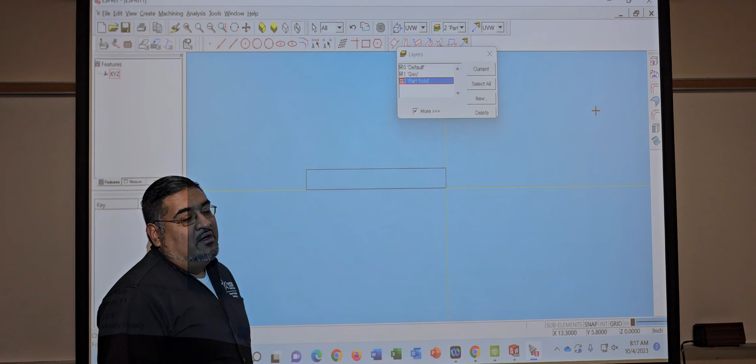Alright, so all we did right now, Corey, is basically draw a square, pick up the layers, and activate the SolidMill under features, right?

Alright, so from this point, we're gonna revolve, right? Remember, if I go 1.5 and I revolve, that's 3 inches total, correct? So I'm gonna go ahead and change my tools, get my hot pink going on, options, group lines.

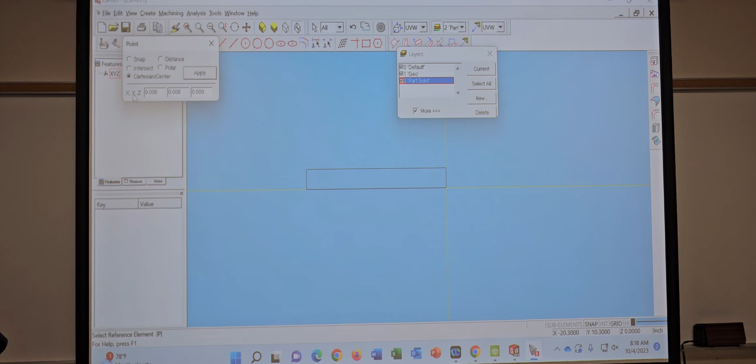So Corey, go to point, and then in Cartesian, on X put -12, and on Y put positive 1.5. Enter. -12 and 1.5. Yeah, hit enter. See how I made that dot?

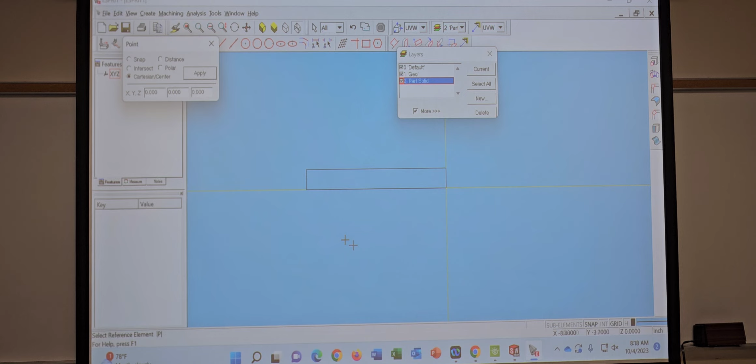So Corey's is showing like the stock material of the lathe, right? I don't know if y'all went over this through intro, correct? But if I hit Control M, that turns on my mask, right? So here, if I go to details, lathe stock, if I unclick that, it should go away, right? What about the chuck? Is that in there too? So there should be. Because the yellow stock went away, but then the green chuck's still in there.

So lathe stock. That's not gonna be on there. Yeah, I think, cause you had already worked on that, right? Yeah, it's brand new. I just opened brand new. You just opened it? I don't know why that came up then. Because I hit this, oh solid, he went to the solid, the solid turn. Solid turn. That's why. Oh, okay. I mean, which we are gonna be under solid turn. I'll just wait till we get to that point.

So, lathe stock. Oh no, wait, we're gonna be under mill. Yeah, oh, this is mill? Yeah, cause we're doing the holes. There we go. We're good. All's well. Yeah, so this is what we're gonna be using, guys. This wrap drilling, wrap contouring, and everything like that. We're gonna use that for doing the live tooling. All right. Okay, so we're on mill then, not, yeah, lathe. We're on mill. Okay. All right.

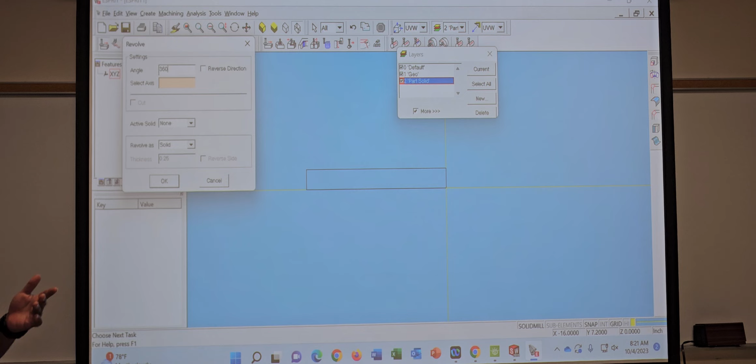I'm gonna hit revolve boss cut. So by default, angle comes on at 90, right? We want to hit 360 on there. So what this is gonna do is it's gonna show you the feature all the way around 360, correct? If we leave it on 90, only 90 degrees of it's gonna come out. 180, only half of it, right? 270, 3/4 of it. 360 is gonna do the whole thing, correct?

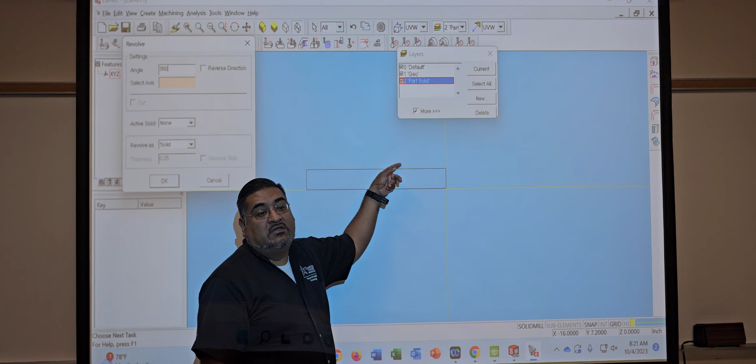So now, what it's saying on the bottom, select axis. Select what axis we're gonna turn this feature on. Does that make sense? So if I have a feature that has a bore and is coming up and everything like that, this X line can still be used and you're still gonna click the X line. Because if I click, like let's say this one, it's gonna do the 360 on this, right? So since I'm gonna put it here though, it's gonna sit true to the machine on the spindle center. Does that make sense? So I'm gonna click select axis.

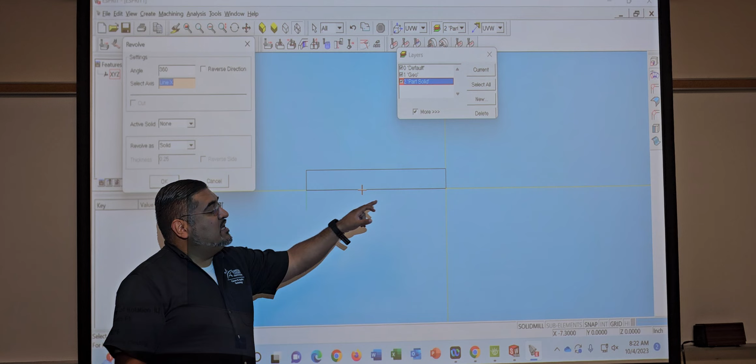Now it's telling me right here, select center rotation, right? So I'm gonna click that line. Now, since I just opened this up, I could see that these green lines came in, right? But why can't I see my drawing? Because of my shaded view. It's not activated, correct? So if you do that and you're like, I'm doing it and nothing's happening...

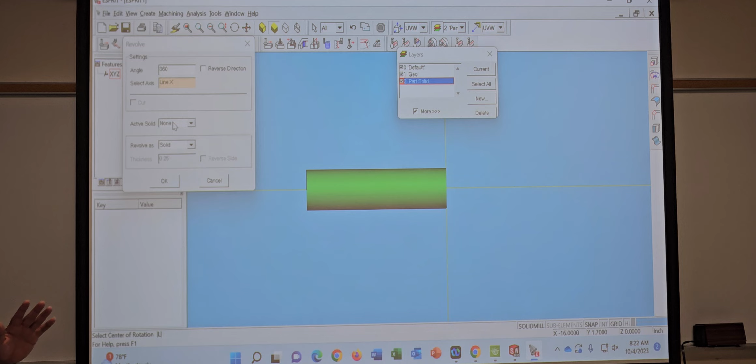There it is, right? So since it's our first solid, we don't have to put active solid. We leave it blank, right? Then we're gonna hit OK. So there it is, right? So since we made this one on the part solid, if I check that out, it goes away. Comes in, goes away, right? That easy.

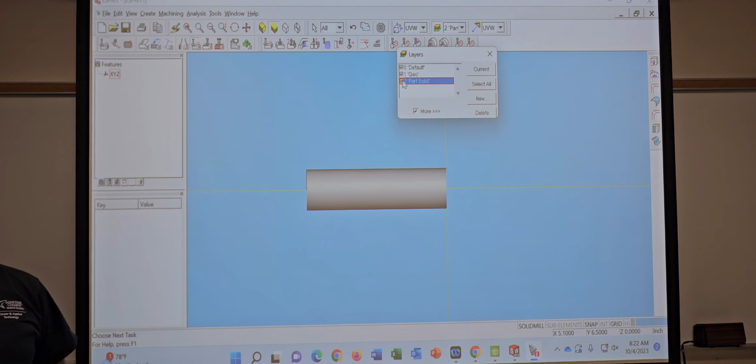Where's my Geo though? My Geo's gone. I don't think you made it because we already had ours. No.

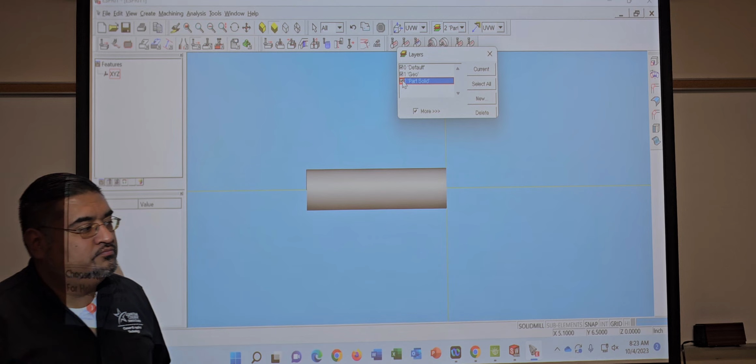So quiet here today, because we're just scanning in here. The mustache ain't talking.

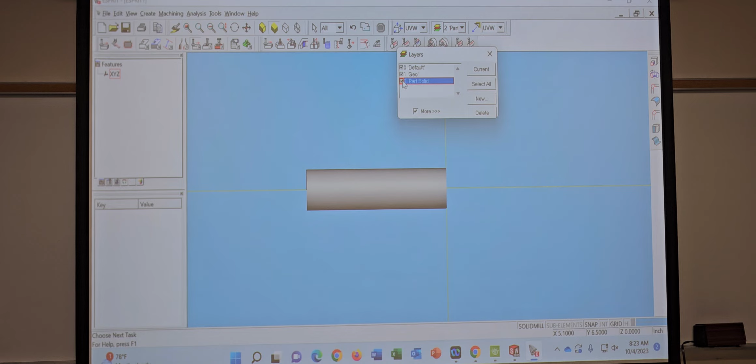Alright, now, just as we said earlier, guys, there's different ways of doing this, right? So typically, normally, the way that they would show you to do it is go back to unbounded geometry, create that point, and then on X, go -2, right? On, times 2, -2 on the X, right? And it's just gonna take you right there, correct?

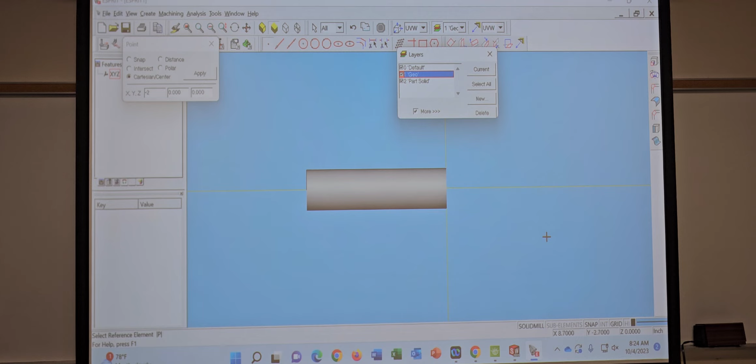So if I do that, oh look, I'm on the part solid, right? So if I click it though, it's there, but I can't see it because it's on the part solid, right? So I'm gonna highlight Geo, take off part solid, then do it again. So -2, apply, there it is, right? But if I turn on my solid, it's still in the center of the part, right? It's on the X-axis, but it's inside of the feature, right? Dead center of it, correct?

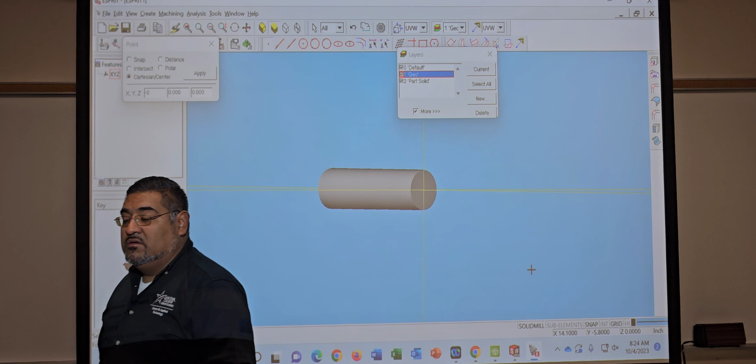Mm-hmm. So there's a few ways of working this out. I can just unclick it, click that point, right click, copy, translate it. So I'm gonna move it on Z. How much? 1.25. 1.5, right?

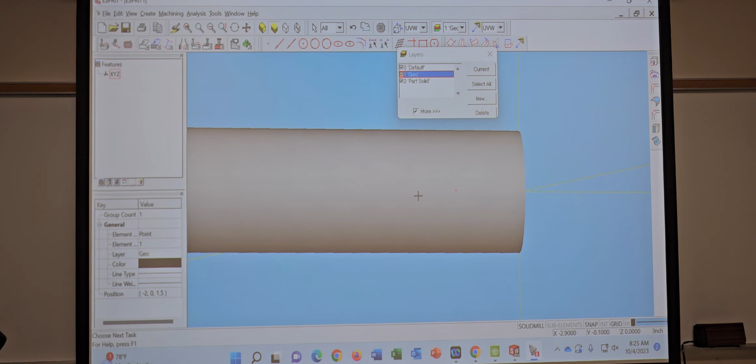Enter. So you see how I moved it up? And even if I put on my part now I know that it's there, correct? Or the most faster way, guys, but you gotta know what you're doing, because you could confuse yourself, right?

Let's click that point, go X -2, and on this Z. So this is for X, this is for Y, and this is for Z, correct? So on that Z, put 1.5 there, and it automatically brings it up, right? So that's the faster way of doing it. So you can do it any way you want, but as long as it's there, that's what matters, all right?

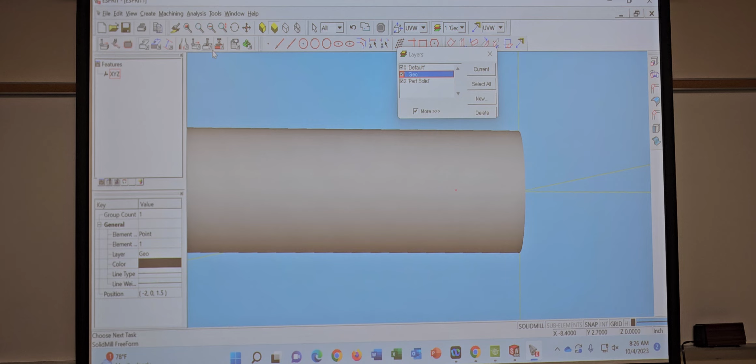I don't get it. Mine's not in there. So watch. -2. No, that's on the inside, 0.1. In fact, I go up. It's not gonna go up as Y, it's gonna go towards you. So it might be where it's at right now, but okay. Yeah, wait, that is towards me. Where's the other one? That 1.5 brings it towards you.

Yeah, so X is left to right, Y is up and down, Z is towards you and away from you, correct? Z is up and down, right? Well, if I'm looking at it like this, copy, right?

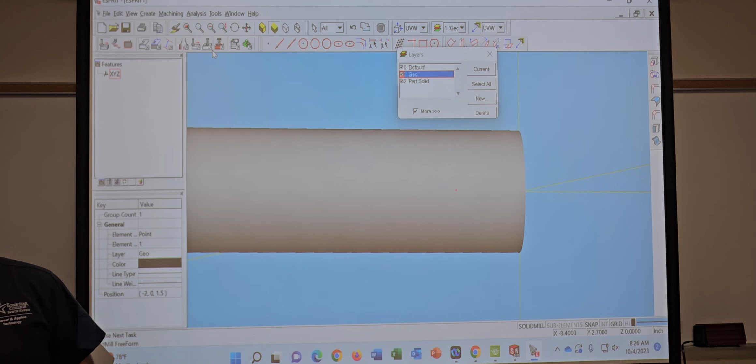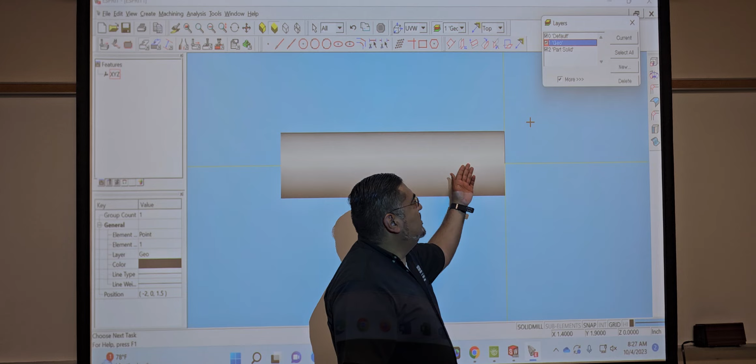Now, remember, it's not the same as on the actual mill, yes. Your X is this way, Y, the table goes this way, looking up and down, your Z goes up and down, looking down at the part. Yeah, but if I'm looking at it on ESPRIT, this is X, this is Y, and Z is coming towards you and away from you, correct? So we gotta kind of switch our mind, kind of looking down at it. Yeah, I see what you're saying.

Pretend you're an angel hovering above, floating, looking down. Your little wings flapping. Yeah, your little ponytail spinning really fast, holding you up.

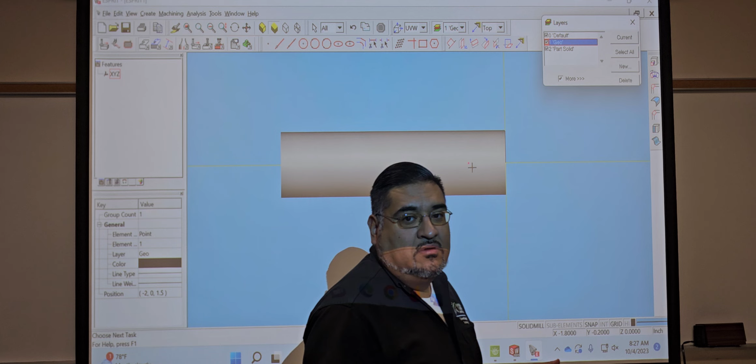Alright, so after that, really guys, we could just make this point rotate, right? Because when I do my P-top, all I gotta do is click the points, correct? And then whatever drill I pick, that's gonna show the actual drill that it goes in there, the feature, right, on the simulator.

But if we wanted to do the circles, okay, too easy. Draw the circle, bring it here. That's what, a 1 inch? Yeah, 0.5 for the radius, right?

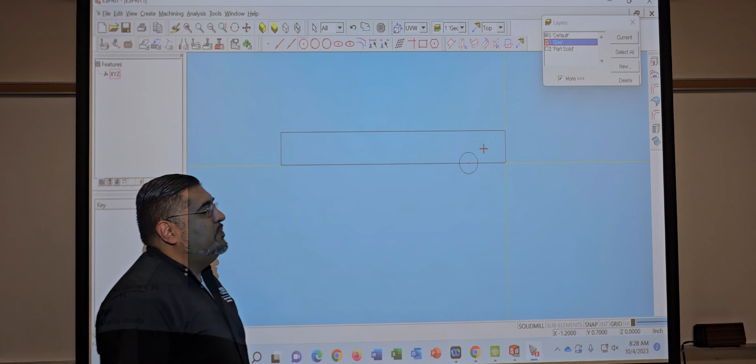And there it is. I'm a big fan of just putting the point there, right? Especially since in ESPRIT you could pick different tools to follow the same p-top, right? So if I'm doing this in real life, I'm putting a center drill first. And if I'm messing with Inconel, I'm making a pilot hole, right? And then after that, I'm using the drill, the end mill, whatever I need to take it to size, right? Because we gotta think about it in real life, guys.

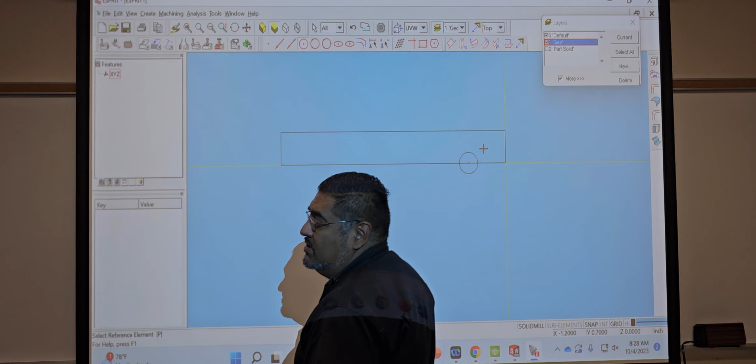If I have this 12-inch part sticking out, I'm actually putting a tailstock in the front of it too, right? To support it between centers, correct? And if I'm just using an end mill, but it's Inconel, oh, there ain't no way I'm gonna be using a high-speed steel drill, HSS end mill, to just go in there, go to town with it, and then come out. You won't even get done with the first 12, and that end mill will break, right?

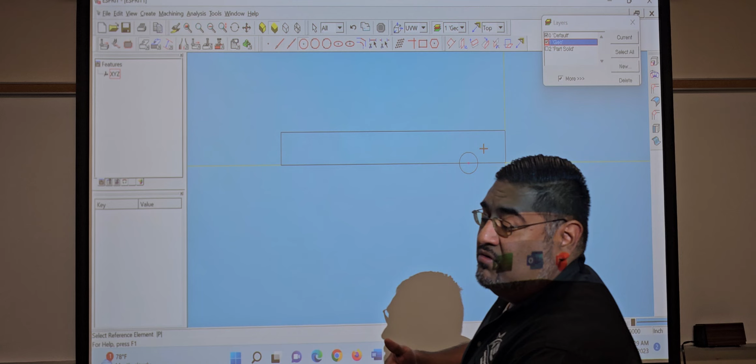So if I'm doing this with Inconel, like I said, I'm gonna do a spot drill, then I'm gonna drill down there. I'll probably drill the size of the hole, or maybe a little bit smaller, but at the bottom it's gonna create that point too, right? Because of the drill angle, whether it be 118 degrees, 90 degrees, or whatever it is, correct? Then I'm gonna come in there with my end mill and clean it up. Does that make sense? We're just teaching you guys right now how to do the operations, but if you do it in real life at a shop, you might need to do all those operations, correct?

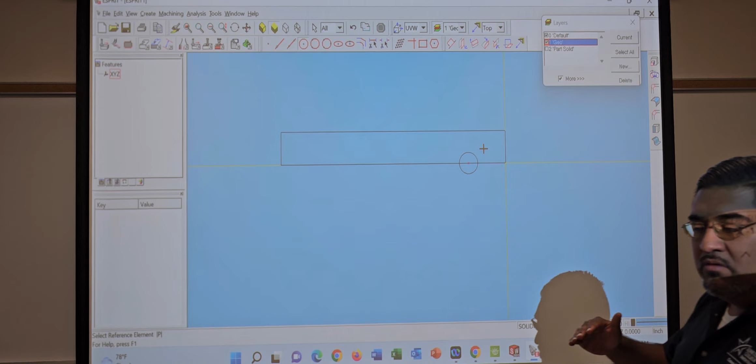And then on top of that, we know that we gotta make sure that our tools are where we need them at, right? Because when you're talking about live tooling, when you guys haven't done the fundamentals class yet, when we're doing live tooling out there, you're gonna see how there's a station in between, right? Yeah, we talked, actually Gabriel talked about that. So yeah, there has to be a station in between just for clearance stuff, correct?

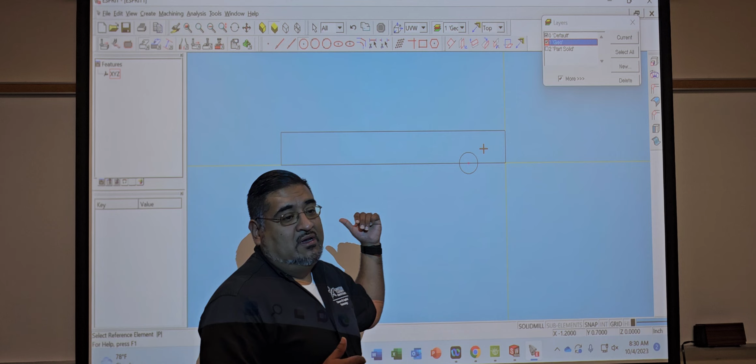So my tools have to match up with what I have in there. It doesn't matter what I put in here, it could care less. And when it generates that code and puts it out there on that machine, I gotta go through the code and make sure my workstation, my axial end mill, is matching up.

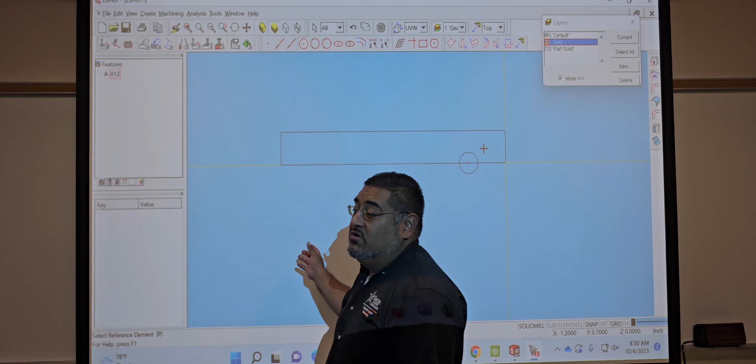You put 3 stations on that lathe, you're basically using up how many? 6. Minimum 6, and that's you putting them correctly. Might be even 7, because your tool number 1 will probably be on the other side of it, so you can't separate it. You get what I'm saying?

So if you're only doing the part that's facing, turning, and doing these holes, yeah, all day long. But what happens if you have more features on this part? What happens if you have facing, turning, so you need a rougher, you need a finisher. Then you have OD grooving. Then you have bores. You're gonna have way too many tools to make it make sense for you to do live tooling there.

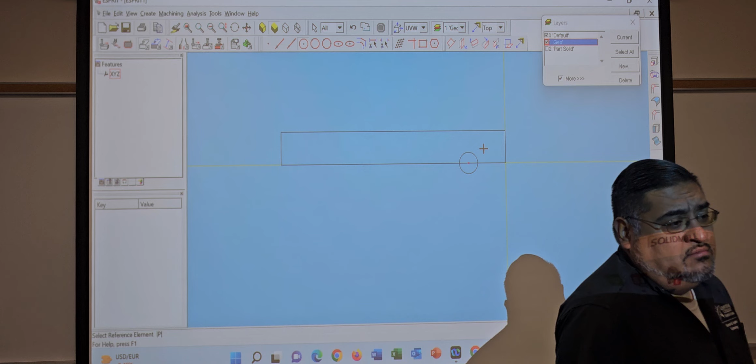So the mill guy will probably be doing these operations when you're done with it. It just depends on your situation. If you got one of those real high-speed machines that have 2 turrets on them, then you'll probably be good. If you have like a Mazak Integrex, that's basically a lathe plus a mill.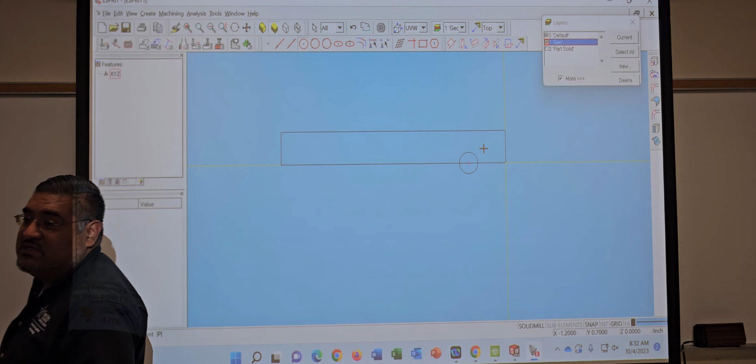So with its umbrella of tools, you can fit about 30 or 40 of them in there, then no problem, you're gonna knock everything out on the lathe. Why take it to the mill? So it's whatever you have to your capabilities. Does that make sense? Not all of us could go out there and buy a $250,000 Mazak for our first machine, correct? I mean, if you're Antonio's dad, maybe, but we can't.

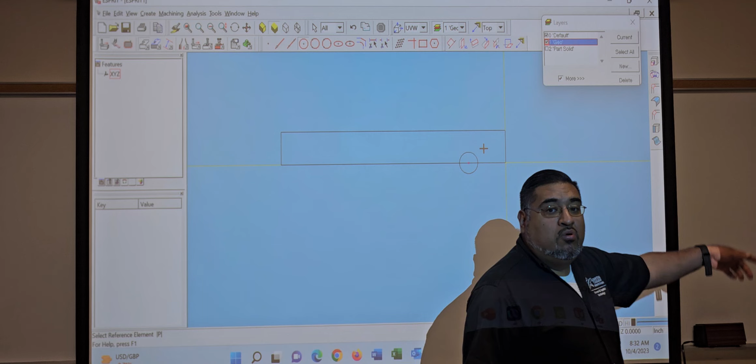All right, so now for this next thing, what I'm gonna do is rotate the point and the circles. I'm not extruding yet, I'm just gonna rotate them around the part itself. I like highlighting the dot and...

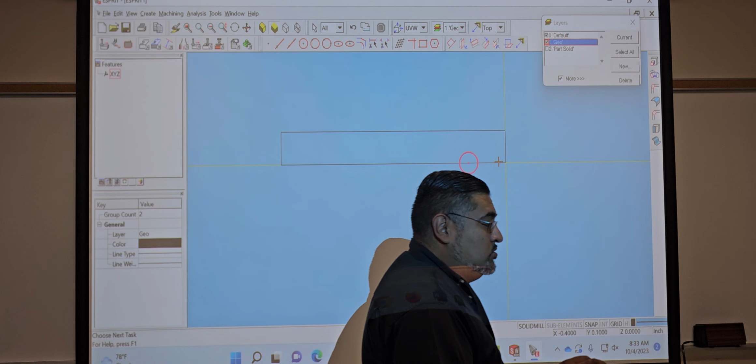I was still in the circle, and highlighting the circle, making them both. Because if I make them both, whenever I do my P-top, all I gotta do is click the point, and that's it. If I just take the circle, I still gotta make sure that I get in the center of that circle. Does that make sense?

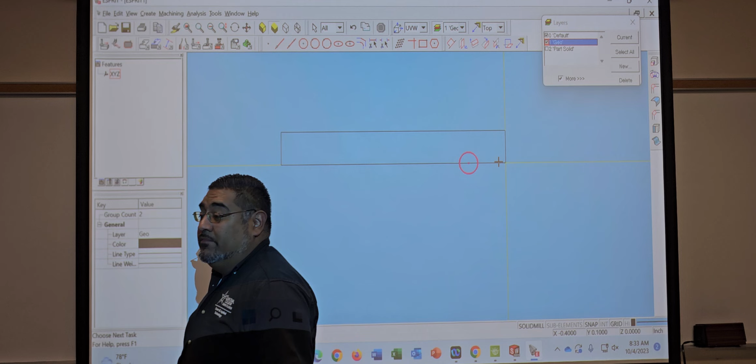So it really just depends on what you wanna do. If you wanna make a print with it, then you do the circle. Otherwise, if you're just doing the machining, you just do the point. You can't make a print with it in ESPRIT. Only SolidWorks. Remember, ESPRIT doesn't do blueprints.

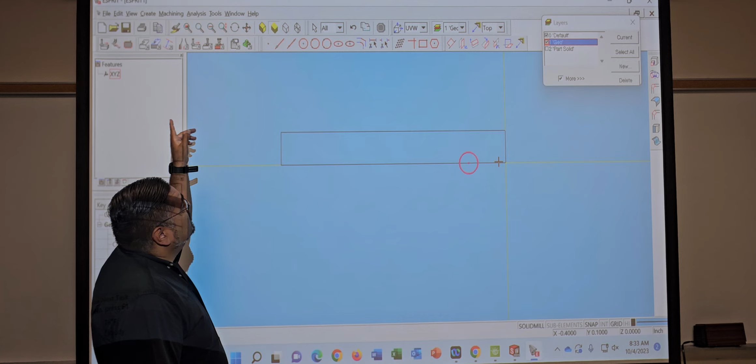I could do dimensioning or distance, I think it's called, and I could write down the distance that it has, but it's gonna come out in neon green letters. So basically if you wanna visualize what it's gonna look like, yeah, if you want to more visualize than anything. But like I said, that code that goes out to the machine, them circles are unnecessary steps. Does that make sense? So it's up to you.

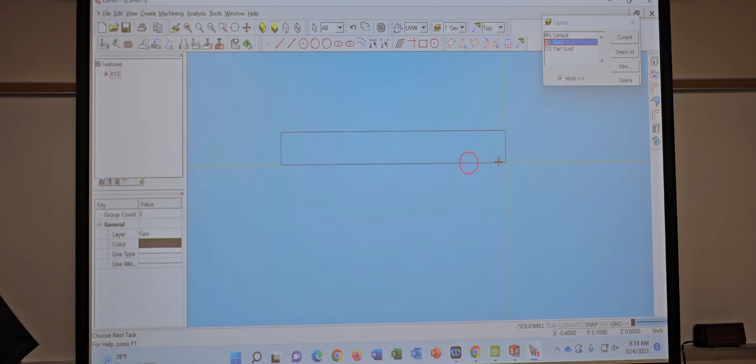Tomato, tomato. Alright, so now that that's highlighted, I'm gonna right click, go to copy, go to rotate.

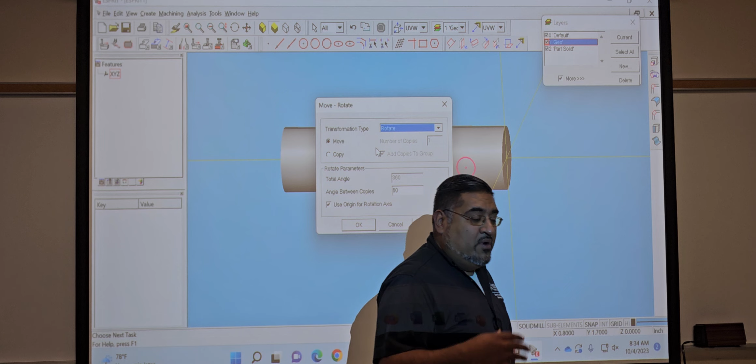So let's talk about rotate real quick, guys. Look up here real quick. Don't just click it, understand the function of it. That way when you do it by yourself it makes more sense, and you're not thinking, oh what did he click, he clicked this, he clicked that, or this was empty.

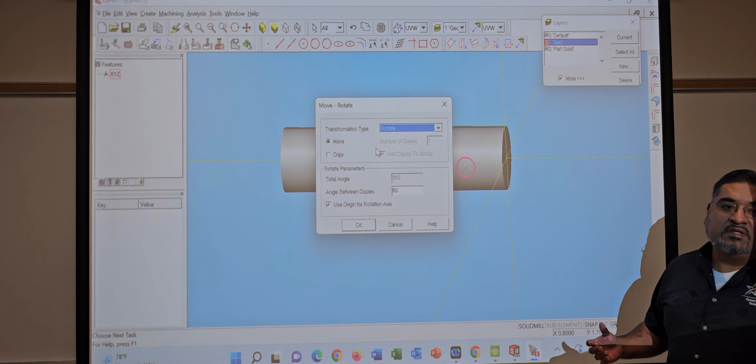That's not the way to learn machining, guys. That's really not the way to learn it. Especially when we're out there on the machines, just learning what buttons we push, that's not the way to learn. You gotta know what every button does, why it does it. You gotta understand the function of it. It's not just memorizing the steps, it's understanding the steps and why we did that.

Because you might F up in your process. You might go, oh, step 1 he did this, step 2 this happened, step 3 this happened. By the time you get to step 7, if you messed up, what are you gonna do if you just remember the steps? Go back to step 1.

But if you remember the functions while it's doing it, you're able to troubleshoot it real quick and still get done what you need to get done because you understand the functions and you know how they work.

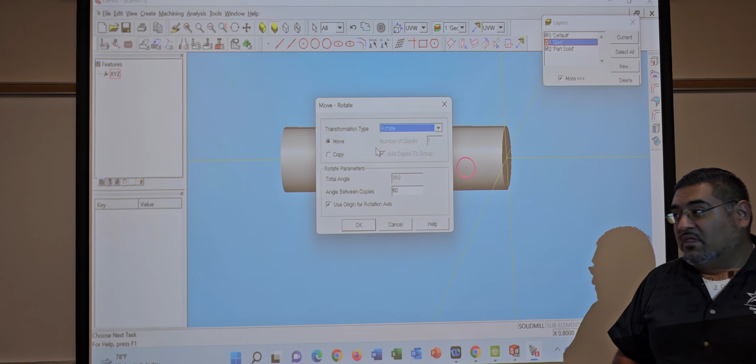Does that make sense? Alright, so rotate, it's gonna rotate around the part, right? If I hit move, it's just gonna move it on the actual part, correct? If I hit copy, it's gonna make copies of it, obviously, right?

So if I hit copy, now this lights up, right? It was grayed out before, now you can actually type into it. So it's asking you, how many number of copies do you want? I want 3 of them, because I'm gonna make 3 more.

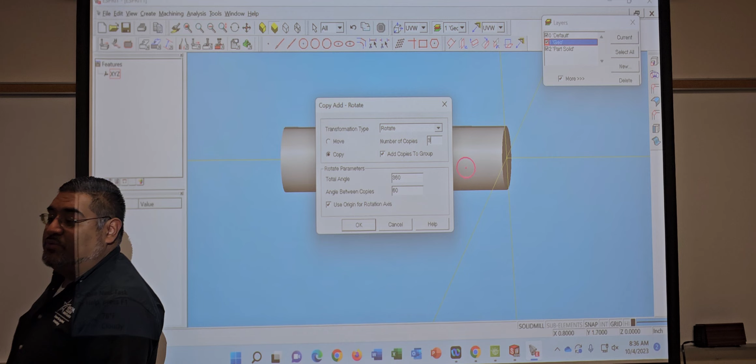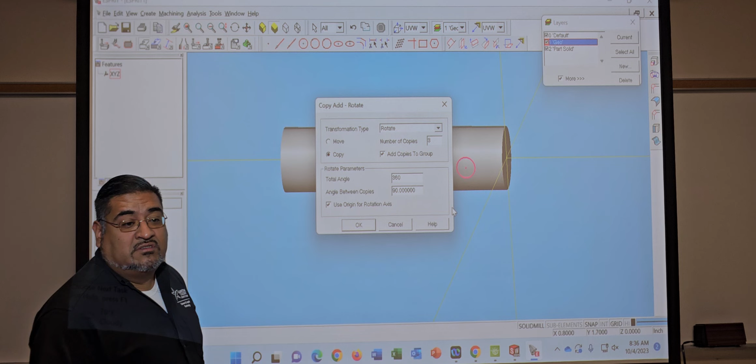Look at the total angle. Right now by default it's just 360 and 60. So it's pretty smart enough that if I put 3 on there, and if I just click down here, it automatically knows, hey, I'm gonna rotate it 90 degrees from each other. That's so smart. Does that make sense?

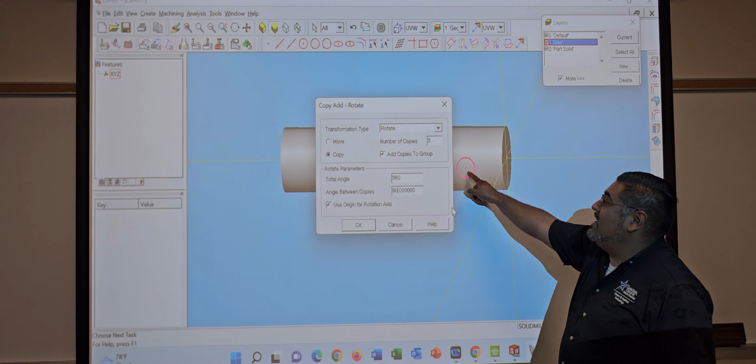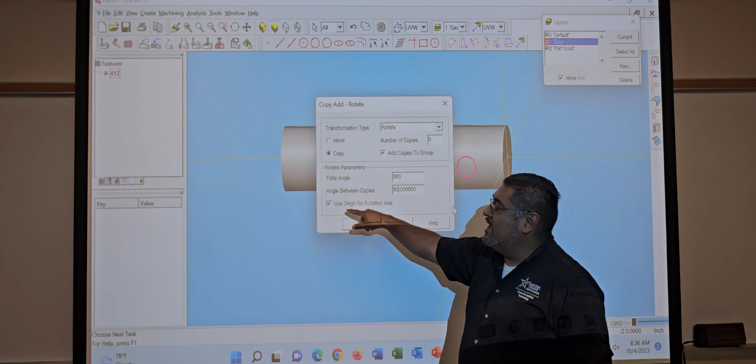So if I keep use origin for rotation axis, it's gonna make it in this plane. Is that 1.5 out on Z? It's gonna make them right there. So if I unclick that, then I can click the axis that I wanted to rotate on.

Did some of you guys go into that yesterday? Yep, I did that. Yesterday was kind of like a rush day on this because we were finishing up William's part out there, and he kind of took some time. So you guys could thank him later on.

Yeah, so I'm learning now.

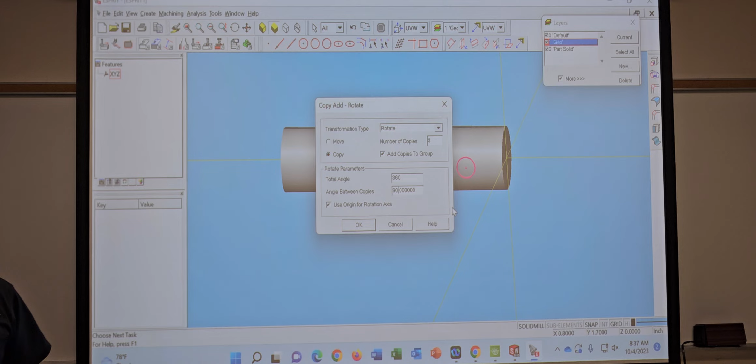Alright, so I'm gonna unclick that because I want to rotate around the part. So I'm gonna unclick it. Now I'm gonna hit OK.

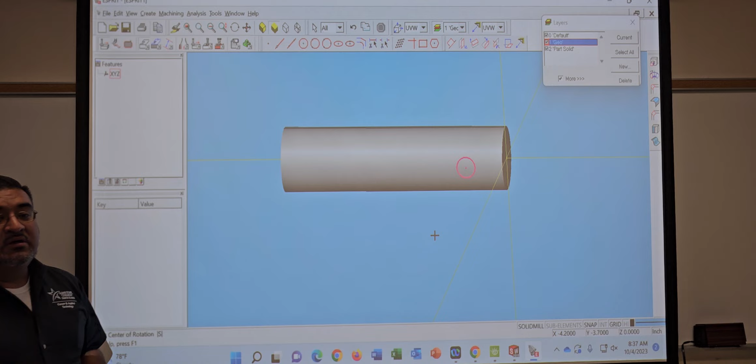Once I hit OK, it's activated, right? So it's asking me on the bottom left, select center rotation. This is like if I click line and I made a line and line stays pressed on. It's activated right now. If I hit escape right now, I just lost what I did with that little window. Does that make sense?

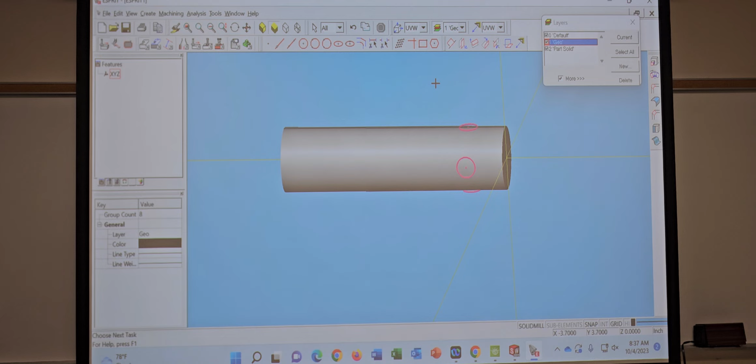So right now when they ask you, select center rotation, I'm gonna click on my x-axis. Boom, there we go. Hit escape just to make sure you're out of it. And then click anywhere on the blue. And you're not highlighted anymore, right?

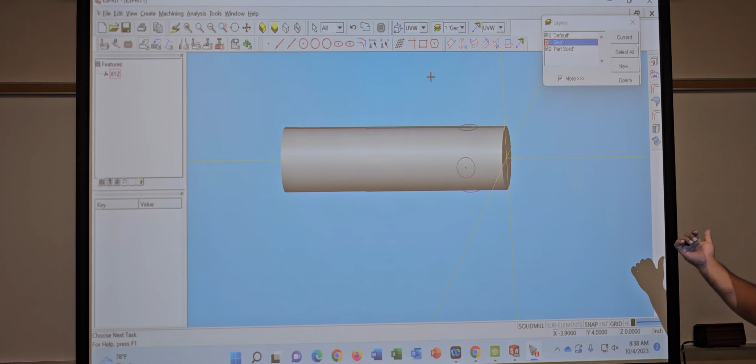Like I said earlier, you cannot highlight each circle and try to extrude it, because one's going up, the other one's going down, the other one's going this way, the other one's going that way, so it doesn't like it. And SolidWorks, you can. SolidWorks is smart enough to say, hey, you want to extrude on the part, I don't care which way it's going, you're extruding the part itself, so it's going to go into the part no matter which direction you're going. But ESPRIT is like, nah buddy, you need to tell me exactly where I'm going to be extruded.

Alright, so hold on guys, let's finish this up just to the extrusion, and then you guys can look at that, and I'm gonna give you guys a chance to do it any way you want it. See how much faster you can make it.

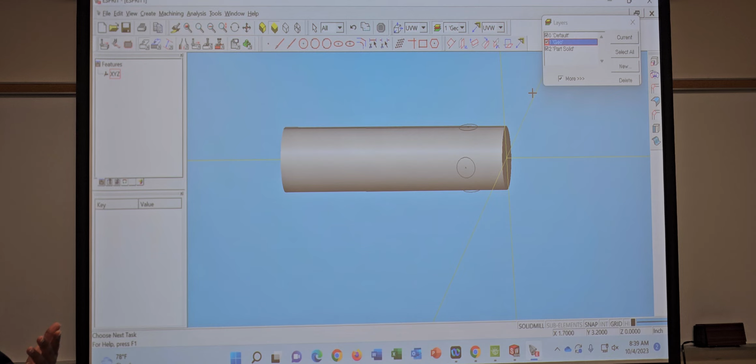Alright, so I'm gonna highlight that circle, and then come over here to extrude boss and cut. So this one's already facing down. If I hit reverse direction, it'll go up, it'll go down. So my distance is what?

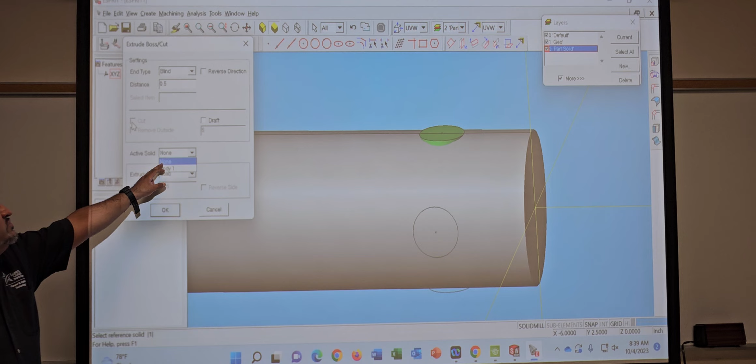0.5, correct? I cannot forget to go to active solid and hit body 1. Because obviously you guys see that cut isn't highlighted right now. If I don't activate body 1, if I'm still on none, cut is still grayed out because I don't have anything to cut into. Once I select body 1, I'm telling it, hey, on this part that I selected, cut out of that. Does that make sense?

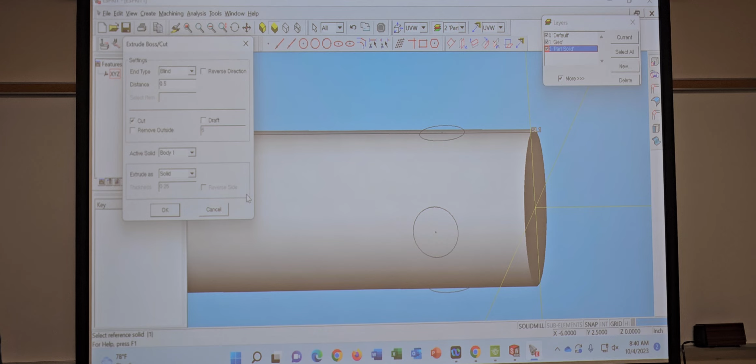So we want to click body 1, now cut, and then hit OK. Boom. So we're gonna go ahead and do that with the rest of them.